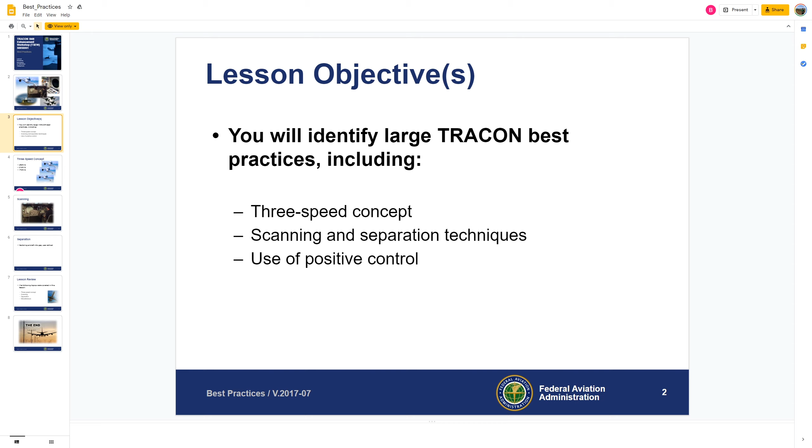So into the slides, if you want to hop down into the next one about the 3-speed concept. This one's when we're getting closer into the airport. There are more than just 3 speeds, but close into the airport, 3 is generally what we'll use. For scanning and separation techniques, generally we'll start from the closest to the airport and work our way out. And then we'll also talk about the use of positive control, how we will maintain altitude during turn-ons to the final. Close into the airport, basically 3 speeds are best: 250, 210, 170. And the reason why we'll shoot to use these 3 speeds is really for consistency's sake.

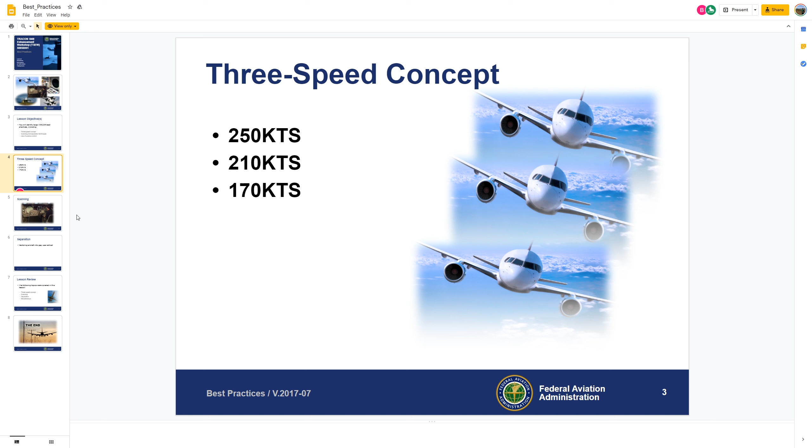250 slowing to 210, you're going to lose about 1.5 miles to 2 miles of separation before they hit the speed, and then slowing from 210 to 170, you'll lose about 1 mile to 1.5 miles roughly. For scanning, which is on the next slide, again, we're working from the inside of the airport out, primarily looking for overtakes, where aircraft are, trying to figure out lead-in times for turns from the downwind to final, etc.

Separation, that one also talks on the next slide there, just about using positive altitude for vectoring into the gap, use vertical. And this is more so when talking about putting a guy from downwind, base, final, in between 2 aircraft that are already established on the final. Although when vectoring 2 aircraft on opposing bases, you'll use vertical there as well.

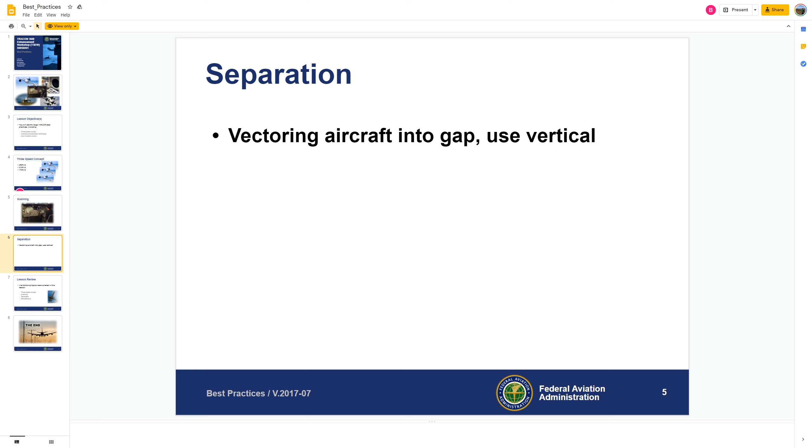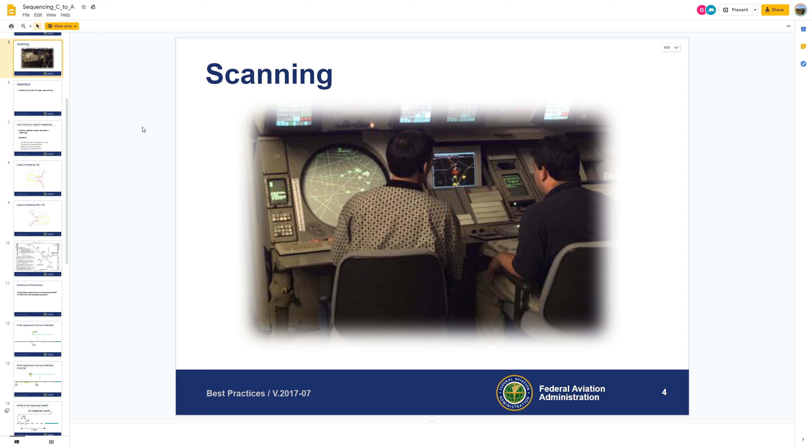What's the next slide there, Daniel? It is lesson review. Okay, yeah. So basically just kind of recapping what I talked about there, and that's the end. So moving on to C to A, if you have that one. Yes. Find the right one here.

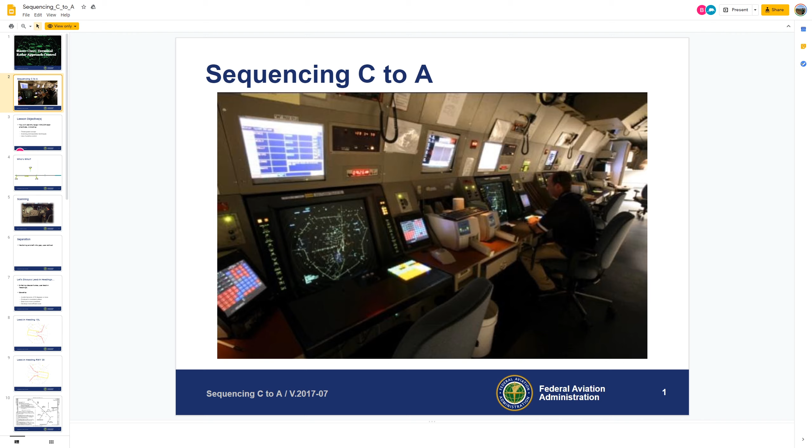That should be it. So this is really the meat and potatoes of what we're going to be talking about, of how to vector to final. Hop down to slide 4 for me, because that basically recovers what we did. So who's who in C to A? A is going to be the aircraft furthest down the final that is already established. The B aircraft is usually one that's already established further. So again, this goes back into what I was talking about earlier about moving a guy from the downwind, putting him onto the final between 2 aircraft.

As you can see, based on this concept here, both aircraft A and B are assigned 170, aircraft C is 210 knots. For general spacing on a final, aircraft nose to tail, you want roughly 4 miles when they're established outside of the final approach fix, assigned 170 knots. That'll compress down to roughly 3 to 2.5, depending on winds.

In this scenario, we have 10 in trail between aircraft C and aircraft A. Talking about what we were earlier, we're slowing from 210 to 170, you lose about 1.5 miles. If we want 4 miles nose to tail between aircraft C and aircraft B, how far do we let this compress before slowing aircraft C? Anyone can shout it out if they know it.

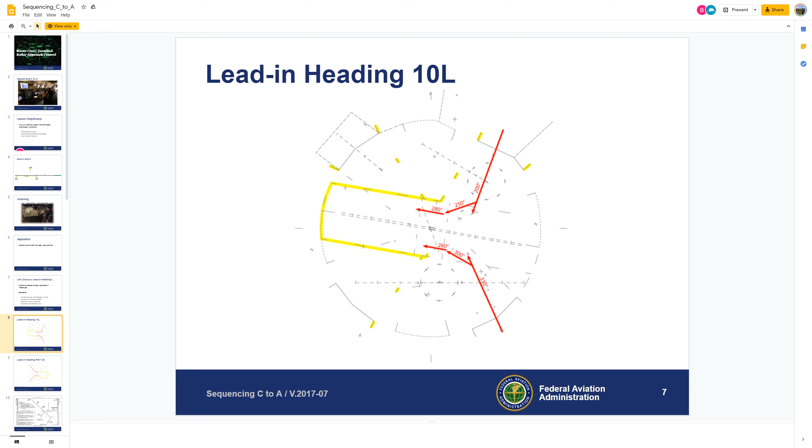The nice part is at most of your large airports, this is already going to be done by the arrival. It's going to be important when you start working at your major airport and start becoming familiar with finals. You're going to want to learn how far the downwind that the arrival has them on is from the final, because that's going to determine at what point you're going to turn your downwind to a base heading.

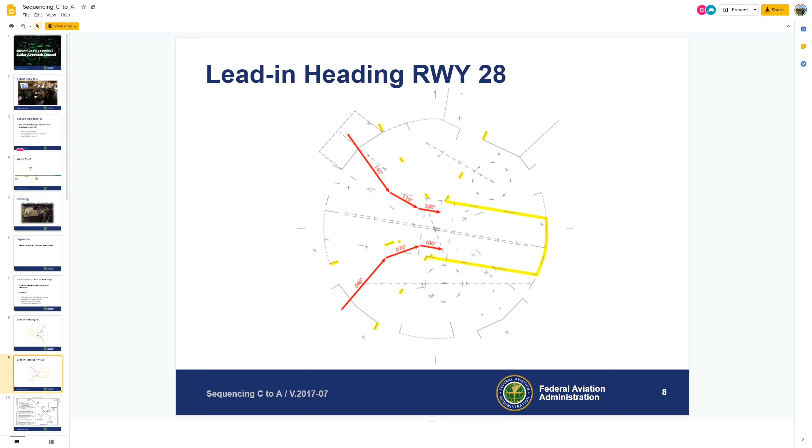The next slide basically just shows kind of what we were talking about here of the 3 different lead-in headings. This would be on runway 28 procedures, and then the next one basically just shows the STAR at Detroit, where the lead-in headings are basically already done for you. Sorry, Rona, I guess. Next one.

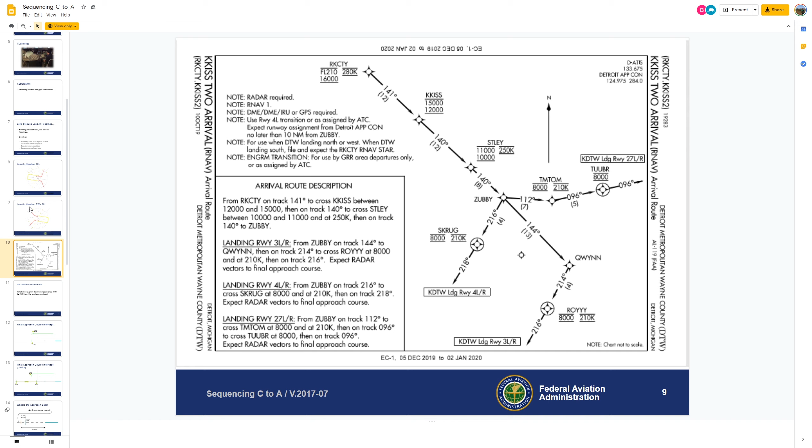Yeah, so I think that last slide basically talks about, all your RNAV arrivals are generally built to generate those tracks without you really having to vector to it, which is kind of one of the big advantages of all these Metroplex arrivals that we're getting now. Exactly, and just like this says, the downwind gets positioned between 4 to 5 miles from the localizer at most of the Core 30 airports around the U.S. There are some that are a little closer, a little farther.

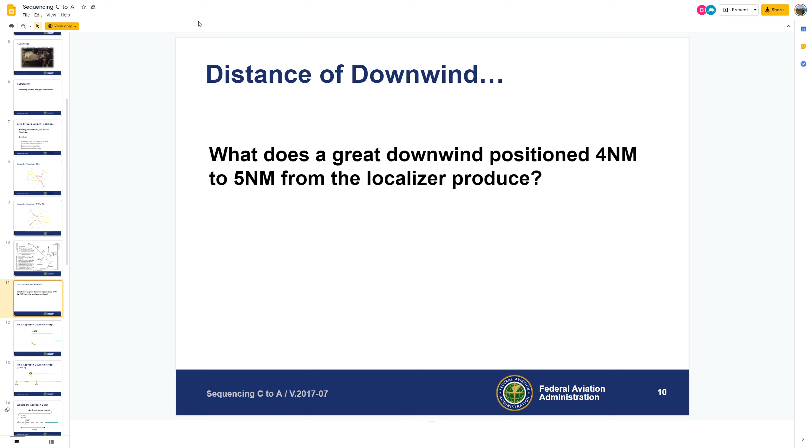And we'll talk about why that's so important here on the next slide. All right, so this particular aircraft, aircraft B, the downwind of this arrival establishes them on this... Say what? Anyway. This particular arrival establishes aircraft B on a downwind heading 5 miles from the final approach course.

If we're shooting for 4-mile gaps on the final outside of the final approach fix, we're going to turn aircraft B 1 mile prior to being abeam aircraft A, which is kind of what you see here, where it's showing the lead-in for the base turn. We want 4, we're off the final by 5, you turn a mile early. If your downwind establishes you 4 miles from the final, you'll turn abeam aircraft A, and so on and so forth. So if you're 6 miles off the final, you're going to turn 2 miles before aircraft A.

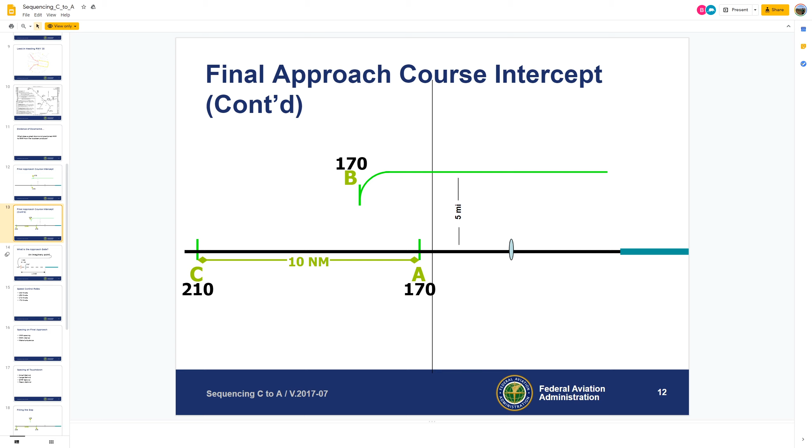Yeah, you can go to the next one. And then this goes back into the slide that we already saw previously. Go to the next one for me, Daniel. Sure. So this is talking about the approach gate. Hopefully all of you understand the approach gate. Do you think we need to go over this, Drew? I don't. It doesn't hurt. I think, okay.

Basically, by this point, one of the things that we teach as S3s is a mile outside the final approach fix is your approach gate. That's effectively the closest you're ever going to intercept, and there are very specific conditions when you can do that. If anybody wants to shout out the answer, what are we typically looking at to intercept final? And under normal circumstances, what's the minimum we can intercept final at outside the final approach fix?

Oh, that's right, everybody's muted. My bad. Brad. 3. Right. So 2 miles outside the approach gate. So 3 miles outside the final approach fix, which in a lot of cases at your big Core 30 airports, you're also generally using the fact that 3 miles steps you down 1,000 feet. So there's usually a step down fix about 3 miles outside the final approach fix that you can aim at as an intercept point. So it usually makes a good point of reference.

And to kind of parallel on this too, visuals versus instrument approaches, you want to control during busy traffic in visual conditions. You don't necessarily need to be running the ILS to make sure that everyone's doing what they need to do, but you want to control the situation similar to as if you were running an ILS. So you don't want to just turn them on base and then, yeah, we got the airport in sight, cleared visual approach. Give them a heading, fly heading, whatever, until established on the final, cleared visual approach. I'll just use mine, runway 22 right.

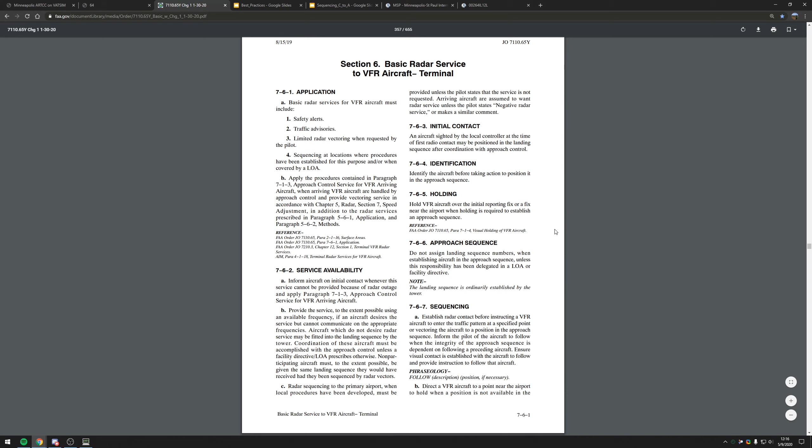Hey, Daniel, can you tab out to a 7110 and pull up chapter 7, section 4 real quick? Chapter 7, section 4. Yep. Because I think what Brad brings up is not just a good idea, it is actually technically in the book now, especially for all these big airports where we're running parallel runways. 7-4-4. 7-4-6. Here we are. So if you want to zoom in to, I think it's, yeah, when conducting visual approaches to multiple runways, there's that.

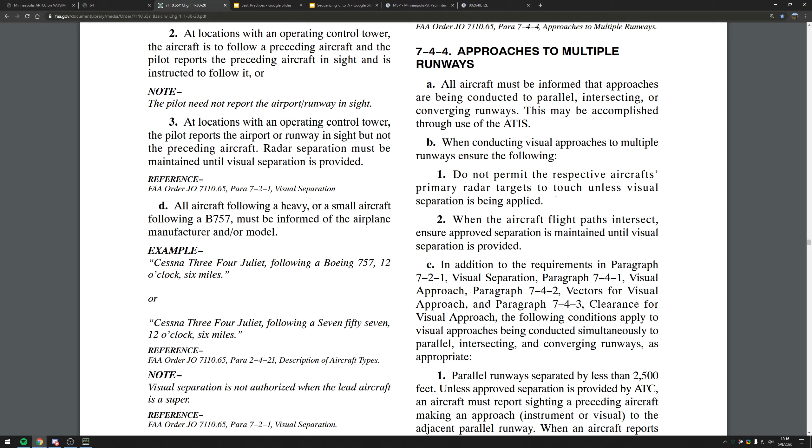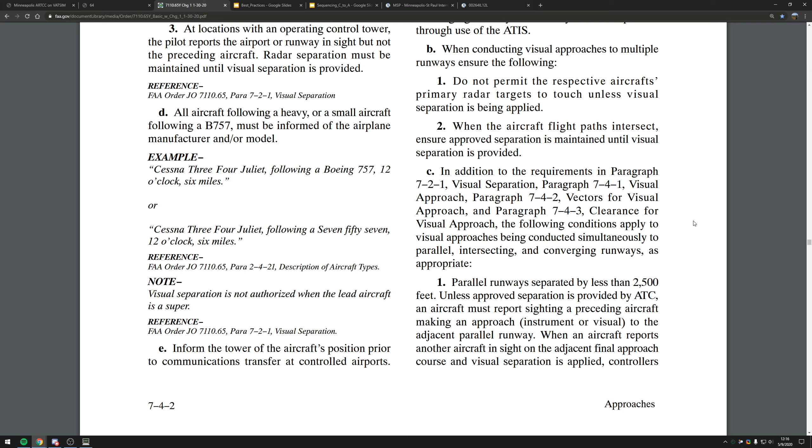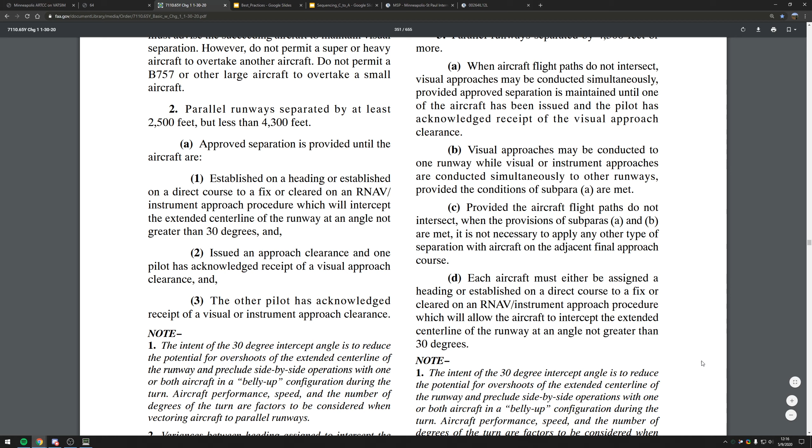So it kind of falls into a few different categories. So less than 2,500 feet, you're effectively treating him as one runway. He has to see the guy for the parallel in sight and be instructed to maintain visual separation prior to giving him approach clearance. Most of us fall into the greater than 2,500 feet category. And then it's either less than 4,300 feet. So for example, at Minneapolis, we fall into this where it says parallel runways separated by at least 2,500 but less than 4,300 feet.

Approved separation is provided until you're established on a heading or a direct course or cleared to an RNAV instrument procedure that will intercept the extended center line at an angle not greater than 30 degrees. So to Brad's point, you're still very much controlling their intercept prior to clearing them for the approach. So it's almost a hybrid of vectoring them to an instrument approach and then clearing them for a visual.

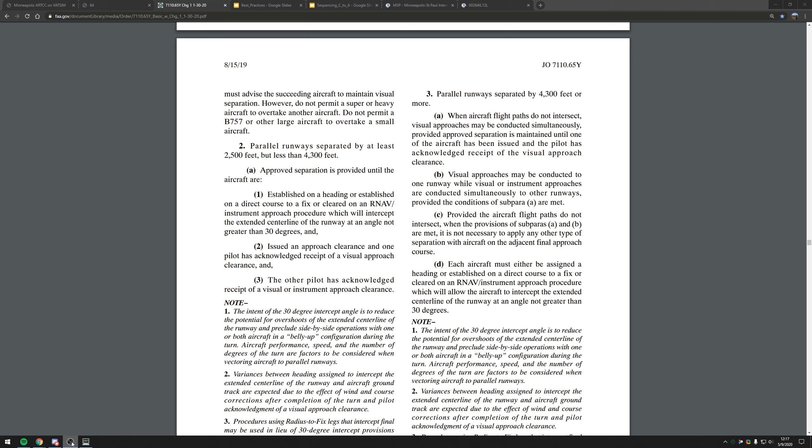And then if you look down in the note, it shows exactly why we're doing what we're doing, to prevent the intercept angle and to reduce the potential of overshoots. I can remember one a few months ago where I had cleared a guy for an approach, he blew through it, I had to issue traffic alerts, break guys off the runways, and came pretty close to having a deal because of it. Thankfully, the pilot turned in time and he didn't end up getting a pilot deviation because I didn't lose SEP. But yeah, definitely issue the headings.

Back to the slides. Affirmative. Here's another thing that I see a lot of people doing: they'll use 170 knots or 180 knots until whatever their final approach fix is. And the final approach fix, let's say, is maybe 7 miles or so from the runway. This is going to cause a lot of compression on your final. If you have 4, you're going to end up running to probably less than 2.5, just because of how far it is from the airport and different speeds on final. So I'm a huge proponent of maintain 170 knots until a 5-mile final. 170 till 5, and you'll keep your 2.5, no problem.

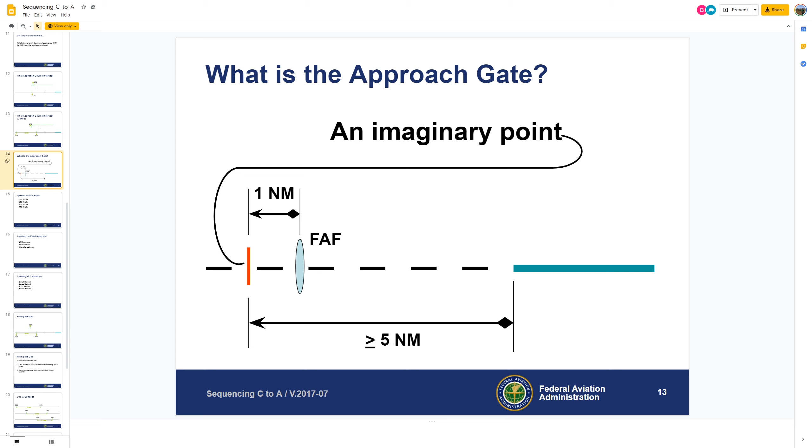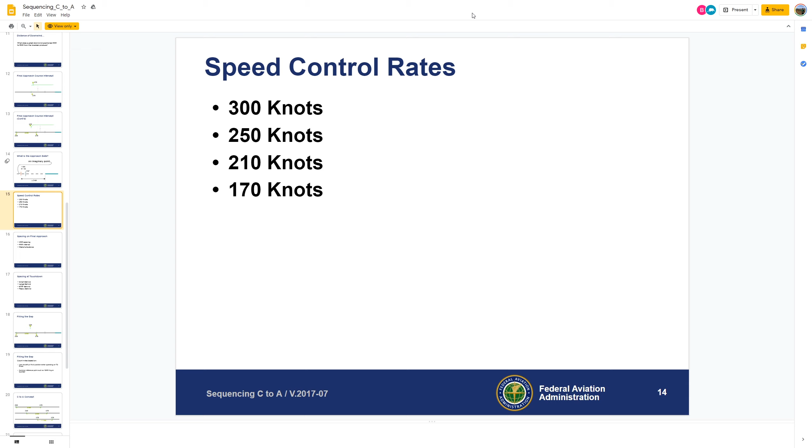Next. So the 250, 210, 300, those are going to be used when you're farther away from the airport and where you're essentially going to be speeding up. This is more from a feeder side, and we'll talk about that once we've hammered out some of the final stuff. Go to the next slide for me. So this goes back to what we were talking about earlier with 3 nautical mile spacing decreasing to 2.5. You do a 4 nautical mile interval on final prior to the final approach fix assigned to 170 knots.

Now, wake turbulence. Drew, what's the current stance of VATSIM or VATUSA on Wake Recat? I think there hasn't really been an official stance. I personally don't teach it to my guys because we don't have a convenient little data block field that shows a recat category. Sure. So I just tell my guys standard non-recat wake turbulence. So, shoot for 5 behind the heavy and you can't go wrong. Okay.

So essentially whatever your spacing is for wake turbulence, add 2 miles. So if you need 5 behind a heavy, you're shooting for 7 on the final. If you're behind a super and you need 8, you're shooting for 10 behind, which really is a large gap, and it feels wrong having that big of a gap, but it's what's got to happen. It sucks. Next one for me, please.

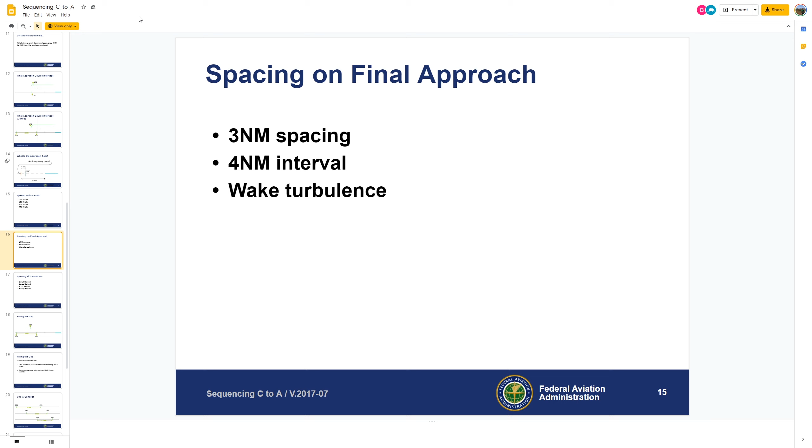Can I throw one more thing in there on that last concept? It's also important to note that the whole 3 miles at touchdown or 2.5 miles at touchdown, that's typically only going to be on runways that are exclusively being used for arrivals. Correct. So, for example, like the Minneapolis scenario you guys are going to see, we don't have the benefit of 2 sets of parallels, so our runways get used interchangeably, arrivals and departures. So at a place that's arrivals and departures, if you want to give your tower controller a chance to push out departures and you run a 3 mile in trail final, your tower controller is going to be ready to kill you by the end of the event. Yep. Probably will have killed you by the end of the event.

So what you'll see during the scenario that we run is more of a 6 compressing to 5 at touchdown, or a 7 compressing to 6 at touchdown, in order to gap for departures. And this comes back to knowing your own airspace and your own flow at the airport that you're working. Exactly. If your runway doesn't have high speeds, 2.5 isn't going to work. In fact, 2.5 is not legal if your runway doesn't have high speeds. You would have to go to 3. Yeah, and it's also important to note that 2.5 mile spacing is also only within 10 miles of the runway, correct? Correct. Yes.

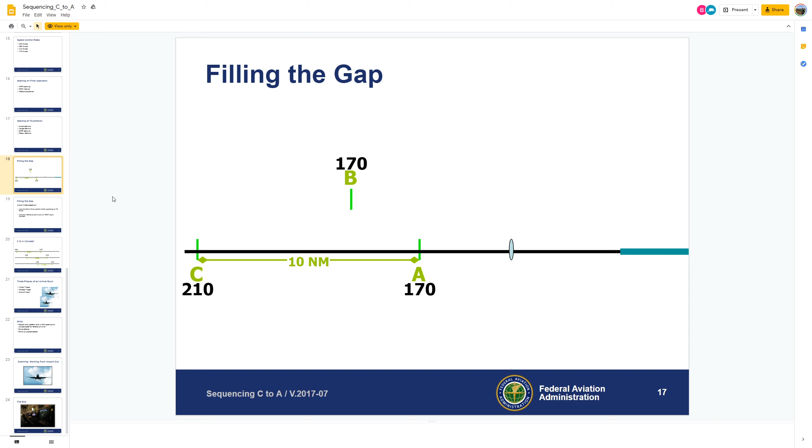Next slide for me. I think it's basically just a repeat of the previous slides. Hop down again. Do you guys want to add in there the utilization of same runway separation with the 2.5? Say that again, Austin. Do you want to talk about same runway separation as well with the 2.5 compressed final? Are you talking about from the tower side? Yeah. Do you think that would really be much to talk about here or no? I guess that is a fair point. Some local controllers can get a little squeamish with 2.5 in trail as far as issuing go arounds. The same runway separation states that you have to have with turbojets that we're going to be dealing with primarily at our airports.

The aircraft has to be clear of the runway prior to the aircraft crossing the landing threshold. The key word there being crossing the landing threshold, not on a mile and a half final, which I've seen happen. So don't be sending people around willy-nilly. It's quite ridiculous. Or you get pilots that hit minimums and go around because there's still a plane on the runway. That would have been clear if they were over the numbers.

Right. Well, the other thing also is that this is VATSIM. Guys don't always do an expeditious job of clearing the runway. So if I'm working local during an event and I know I've got a guy 2.5 miles in trail, I'm telling the front guy, hey, plan minimum time on the runway, traffic 2.5 miles in trail, or traffic 3 miles in trail. Part of it comes down to expectation management on the part of the pilots too. And then I'm probably telling the back guy, just to prevent it, hey, separation exists, still clear to land.

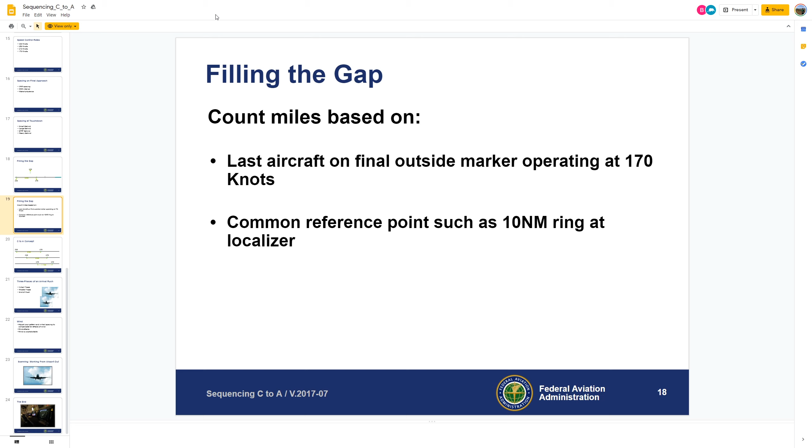So when vectoring aircraft onto a final, can you go to the next page for me? We're doing it based off of aircraft that are what we call fixed. So they are established on the final and on speed for what we're targeting. So if our target speed is 170 knots, I'm not going to use a guy that's established on the final doing 160. I'm going to go to the next guy that's established on the final doing 170. And for note, this is indicated. This isn't ground speed, the readout on radar. This is the airspeed that we have assigned.

Excuse me. Next. Yes, please.

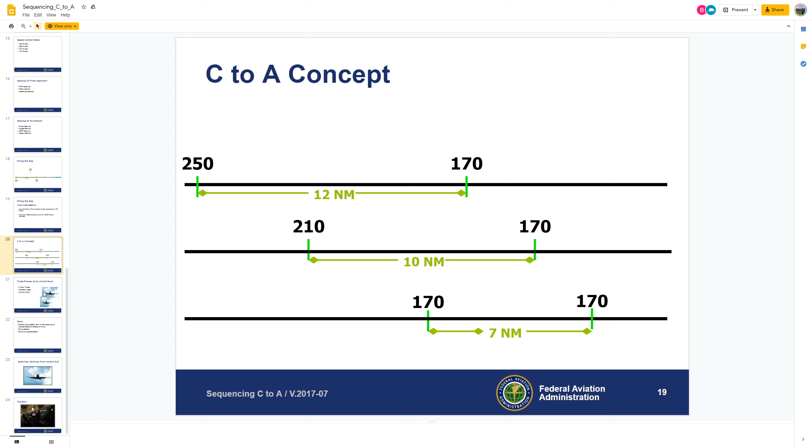This isn't so much important to VATSIM per se. Well, yeah, I guess it kind of is. I think it comes down to don't waste mileage early on when you don't have to. Exactly, yes. That is the complete concept of this, and the thought process behind the initial, middle, and end is in the initial part of the rush, we're keeping aircraft fast. We're not slowing back down to the 210, whatever, way away from the airport. Maybe we're deleting speeds on the arrival, telling them, hey, maintain 250 knots. We're trying to get them to the airport and on the ground as fast as we possibly can.

So we're not doing all of these set 210 on the downwind, 170 on the final. You can kind of get away from some of that and get the airplanes there as fast as possible. The middle phase is when you're going to start pulling things back. The traffic's increased. Now we're going to start going back to basically the set procedures that we have for that airport of doing the 210 on the downwind, slowing to 170, turning final. And then the end of the rush is like the initial, you're coming out of that and you can start speeding things back up. Next slide for me.

And it's important to note there that you might not be assigning speeds. If you don't want him necessarily slowing down as you're starting to build up, the number one or number two airplane, the first couple in the lead of the pack, instead of 210, you might say 210 or greater, and then you give them the approach clearance, and instead of 170 to 5 miles or the final approach fix, it might be maintain 170 or greater, just so that you're putting a floor on it, but you're also giving the pilot the opportunity to slow.

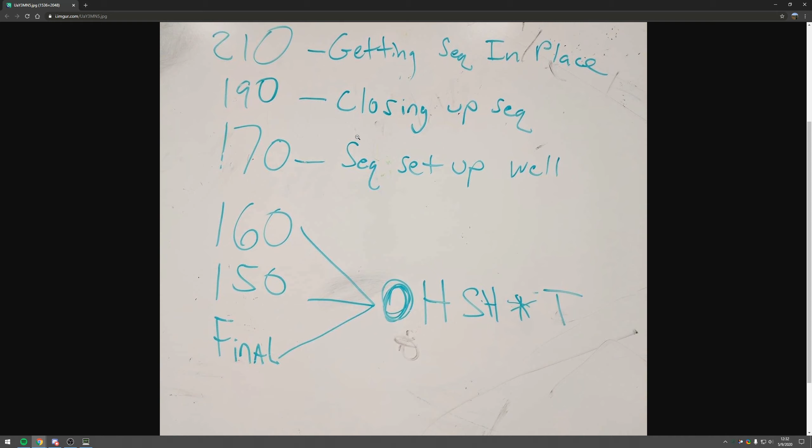Just know that the faster you are on final, to either 5 miles or to the final approach fix depending on what's out there. Yeah, no kidding. That's from an actual debrief at Minneapolis Tracon.

Where'd you put it? It's up on the stream at the moment. Oh, so there we go. That literally goes back to everything Brad's been talking about. At 210, you're still getting the sequence in place, it's starting to come together. At 190, you need to start slowing down, you're closing it up. At 170, we're locked in, like you said.

And then if you need slower than that because you turned a guy a little early or a little late, things like that, it is doable. The section in the 7110 and 5-7 does say lower may be assigned if operationally advantageous. If I'm going to have a deal because I didn't slow him down to 160, you're damn right it's operationally advantageous for me to slow him to 160.

I'll throw something out here too. I'm kind of more of the opinion that 160 is similar to a 170, but below 160 is definitely the oh crap moment. Right.

If you're having to slow somebody to their final approach speed or reduce to your slowest practical speed, and you're 5 miles or more from the final approach fix, you should basically just go, I've screwed this. That aircraft is coming off the final, and you're going to assign 190 to the guy behind him and try to close up your spacing with the guy behind him. There's a certain point where you need to cut your losses, because when you start slowing that final to less than 160, the entire final will go to hell in a handbasket.

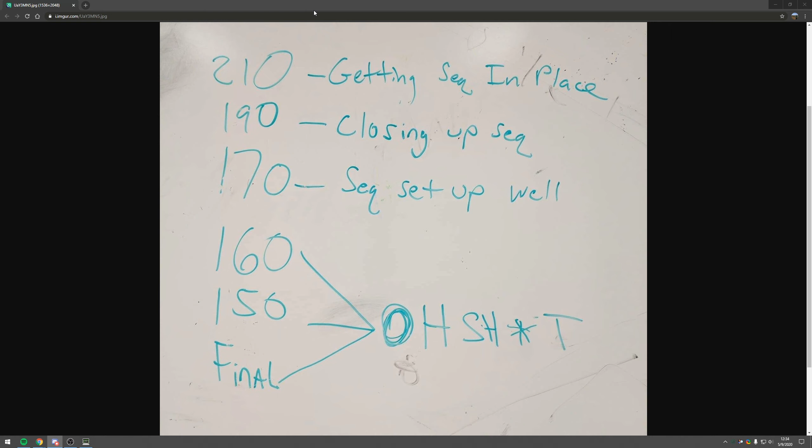That really, I think, wraps up as far as the PowerPoint stuff. I think once you see them actually working and we can explain the C to A with actual traffic of where you base to final and stuff, that'll make more sense for you guys.

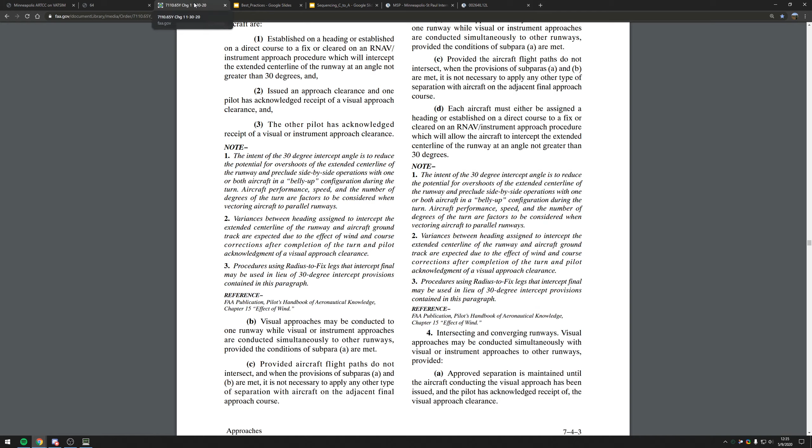We will pause at certain spots to highlight key things, because there are a few gotchas in the scenario. There's a couple cases where feeder screws up and gives you a stack, a couple tie cases or things like that, and then the dreaded turboprop shows up at some point.

Should we talk about feeder sequencing now or give that a little bit of time? We can talk about it kind of as it plays out, if you're good with that. The problem with this particular scenario is they don't spawn at the Tracon boundary, they spawn about the point where Final's taking track control. That's all right, but we can kind of talk about this is what a feed looks like.

For instrument approaches, the general thing is you want to, as a feeder controller, you have all the space, you have all the tools. You want to generally set up guys to a point where you're feeding your final controller 7 to 9 miles in trail, depending on what your constraints are on the instrument approach. So if you're feeding the final guy 2 streams at 5 miles in trail, you're really not giving him anything to work with. You're literally sending them down the crapper.

This kind of goes back to the whole 4 miles on the final, if that's what they're running, 4 to 5. If you're giving them 2 streams of airplanes, aka bases and downwinds, which is usually what most airports are set up for, you can't be giving 4 on each feed.

You have to be giving at least 8 per feed. So downwinds are spaced 8 miles in trail, and bases are spaced 8 miles in trail, because he's got to take that 8 and turn it to 4 in trail on the final.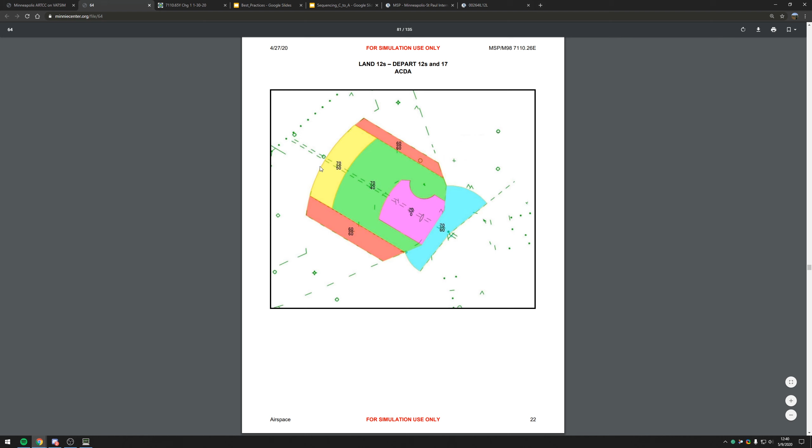As far as the approach chart goes, here's what we have to work with. So there's the 3,000 foot fix Weza, Hamel is 4,000, Allergen 5,000, then You Betcha and CJ for the 6 and 7,000 foot fixes. I'll show you those on the video maps too. So we got Weza, Hamel, Allergen, and then 6, 7 here at the 20-mile ring, I think. Yeah, so the outer marker symbols are 3, and then every tick outside of those goes up 1,000 feet.

It's also important to note that you see that outside that area where final owns down to the ground, they only own down to 4,000. That conveniently fits with the fact that the Bravo only goes down to 4,000 in the final box. Right, yeah, just need to play with the brightness a little bit here. Second.

Okay, I'm gonna go John Madden here for a second and draw this out. So you've got your 1,000 foot, 4, 5, 6, 7.

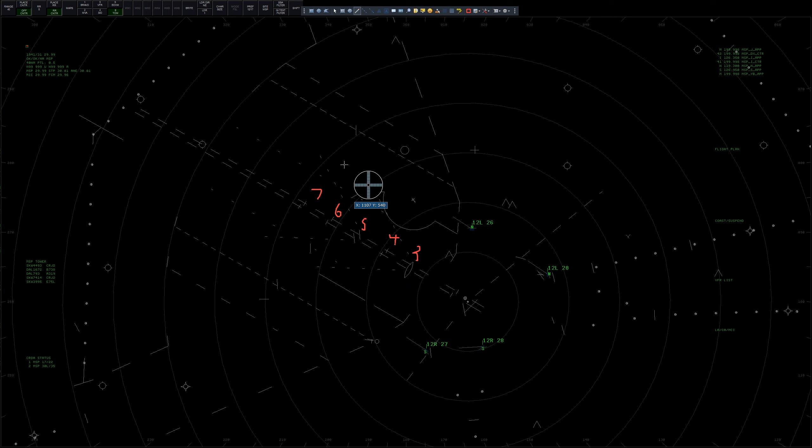And then these two ticked lines here are 30-degree intercept lines. I'll draw it out here. These dashed lines here and here are your intercept lines. So this one here you can see is at the 5,000 foot fix. Like I was saying earlier, that's where we typically are joining the final, because the high side has to join at 5,000. If you're running simultaneous approaches at Mini, you usually have to join around this fix. So there's a 30-degree intercept line there, and then there's a 30-degree line at the final approach fix itself, the 3,000 foot fix. And then these long dashed lines here are your 3-mile fixes from the adjacent final approach course. So this is 3 miles.

Very good art there, that's something to key on. So then you can look at that. That's per SOP: the low altitude runway has to be level at their turn-in altitude prior to crossing that line on base, and that's so you've ensured vertical separation from the high altitude guys' airplanes before you cross that line.

Well, that's a special addition to the SOP, ain't it? Yeah, separation is in the SOP. Glad we don't have that in ours.

Yeah, and that's the case, and you'll see it at Atlanta, you'll see it at O'Hare, you'll see it at all these places with multiple parallel runways. Your low altitude runway will turn a 20-mile final down super low. By design, you'll be level at 4,000 for 8 to 10 miles on final, or whatever your low altitude is.

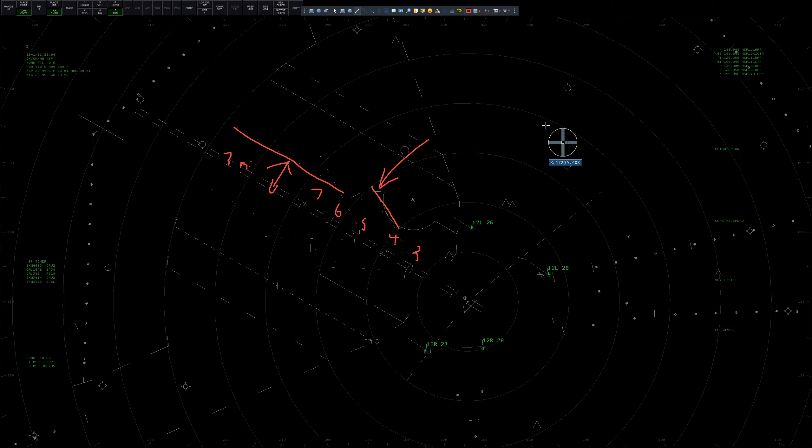Yeah, like O'Hare joins the low side at like the 5,000 or 6,000 foot fix at 4,000 or something like that. They join the low side at 4, they join the middle at 7, and they join the high side at 5. Sorry, the middle runway at 5, and the center runway is the high runway, and that'll join at 7 typically. There you go. That makes more sense. Words are hard.

Yeah, it's okay. All right, so out of curiosity, are those adjacent lines your 30-degree intercepts there? Is that for the visual approach? Yeah, that's visual approaches. Basically, the way they typically use them is if they're inside of that 30-degree line, they can clear direct the FAF and clear for the visual, or clear direct the IF and clear for the visual if they're inside. That's just ensuring that if I clear the guy direct the FAF or turn him in from there, it's less than a 30-degree intercept to final.

All right, if that makes sense. So anyway, moving into the scenario, it's the 12-1-7 configuration, arriving 1-2 left, 1-2 right, departing 1-2 left, 1-2 right, and 1-7. It's IMC, so basically you're stuck to using ILS approaches.

So things to take away from this: the descend-vias spit the downwind guys out at 8,000 and 230 knots. I'll pull it up here as well. You can see there, that's the arrival, that's what the arrivals do. So getting back to what Brad was saying about lead-in headings, you can kind of see the arrivals are built to generate those.

Yep, so the bases shoot them out at 7,000 and 210 knots. The downwinds shoot them out at 8,000 and 230 knots.

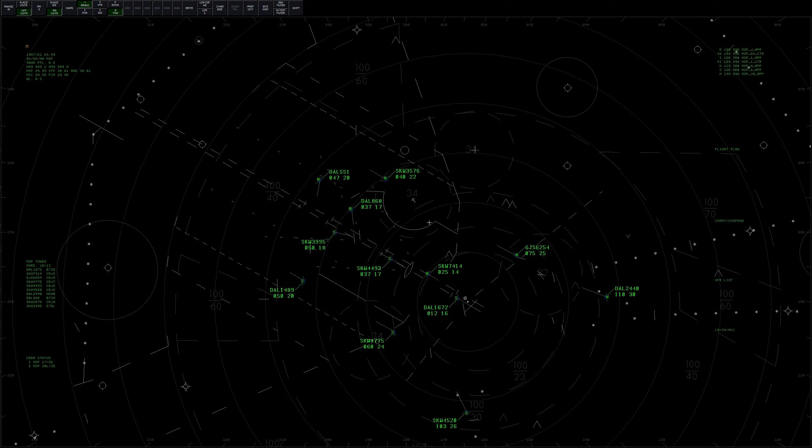Where's the 3,000 foot shelf for the Bravo? Because ideally, I think Delta 060 would have been stepped down to 3 and turned sooner, because SkyWest was already getting pushed out, and you could go 3 behind SkyWest 4493. Right. Yeah. It's at about the 10 mile. It's just outside the 10-mile ring. Yeah. So, anyway, good. Get it going.

And again, the other thing he pointed out is that he was going to break the 3-mile buffer with Delta 551. So whether or not it's the explicit definition of a point out there, he's just telling me, hey, watch this guy, I'm not going to be below your traffic. Right, which is the key thing. So again, talk to your other final controller if there's 2 of you. Don't be muted and unreachable. That's the worst thing you can do. Yeah, mute. That drives me nuts.

Also, keep in mind that you might not be all that busy working an event, but another guy in your channel is. So keep chit chat to a minimum. If you want to chit chat with somebody, go to a different channel. That irks me to no end during an event. Or if people aren't respecting that, then you, as the busy controller, go to a different channel where you're reachable and unmuted, if somebody needs to find you. That's something I would encourage management at facilities to do: if someone's busy and people are in that room just chatting it up, move them out.

So Chris, looking at where we've got Delta 060, if you need to cut your losses right now, what's our plan? If I need to cut my losses, Delta 060 is going to left turn to 360, and he's going to stay at 3,000. I'm going to keep Delta 551 moving in, put Delta 060 behind my SkyWest 3576, and then Lindbergh will follow Delta 060.

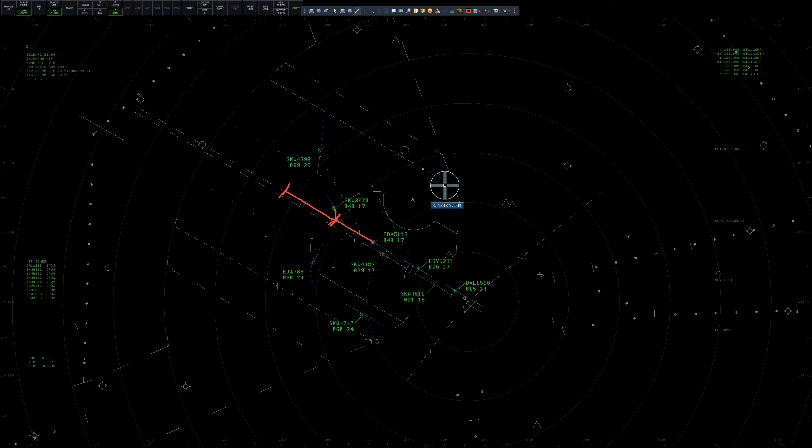I don't know. Maybe that kind of illustrates it. Maybe not. That is kind of eyeballing it. Yeah, so ideally your 12 is Endeavor to that last red hash mark, right? Skywest is falling in 6 miles behind Endeavor. You need your downwind to fall in 6 behind Skywest. I'm not using Skywest as my reference because he's what we would call a broke aircraft, because he's not established on the final.

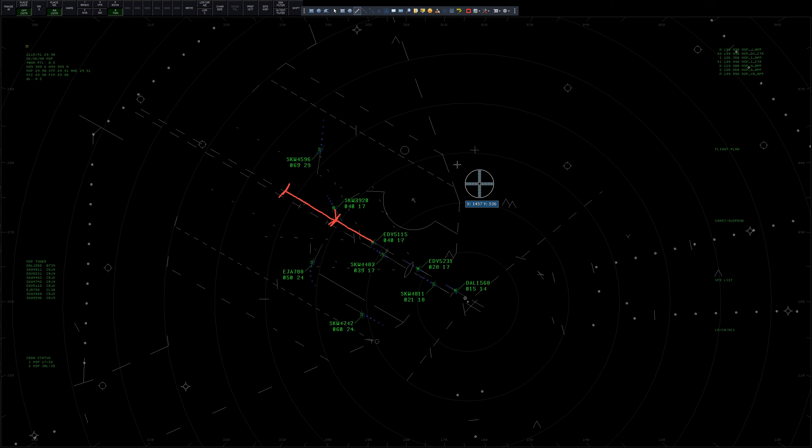What's going on with 4596? What's it look like? Oh, never mind. I see. Oh, that's nice. Coordination was effected. That speed overtake, though. Yeah, he's following. He was told to follow. He's following. It's legal.

Maintain visual separation with the Challenger for the parallel. Follow company. Cleared visual approach. 1-2 left. A small CRJ.

So to answer your question, Clay, you don't have to worry about the whole established on before losing vertical and all of that. But if you're opposing bases, you're still going to want to keep separated by altitude. Because the ultimate question is, what happens if you lose your frequencies? Exactly. Which is why positive separation is such a big thing.

You just start working the final on guard. I've seen that. What if guard goes out? Actually, I haven't seen that. I know that happens. If you can get a word in edgewise between all the meowing. Right. Tell us about the 290 heading to St. Paul on 3-2.

Well, to answer that question, Jared, visual separation does work, and it should not be a bailout, because a bailout means you did something wrong. Visual separation is used to increase efficiency after they're already separated. That's the key. That's to ensure that separation exists before and after the application of visual. So if it's a bailout, separation hasn't been ensured before the application of visual.

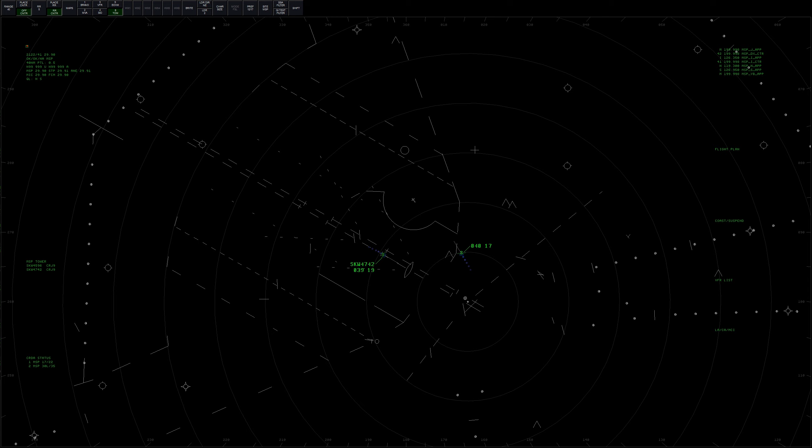Yeah. Or, if your training staff for whatever reason doesn't necessarily have it, try to create the files yourself. It's not terribly unintuitive software. It's not perfect. You know, even building a basic sweatbox to some Charlie or Delta in your airspace, some TRACON like that with a single radar position.

Like say at ZMP, we could do Sioux Falls, where you just have 5 or 6 planes, 4 on the downwind, 2 on the base, or something like that, and just practice that concept. And it doesn't have to be overly complicated either. Yeah. All you need is 2 aircraft and just managing. You just need to manage the speeds and vector in a box, like Drew said. You only need 2 aircraft to do that. Yeah.

If you're looking for Aircraft Situation Editor, which is what you can use, the original author has taken it down, but it is still available on Softpedia or Software Informer. Yeah, so make sure you're running EuroScope for the files, because if you have it set up right, you can also run them profile too, which is a lot better than doing everything manually.

And doing what Drew and Chris just did, that won't happen overnight. Like they said, that's going to take practice, and you will screw up. That's just the reality of it. Yeah, we screwed up 5 or 6 times just running it. Exactly. I think the first time me and Shane took a crack at this scenario was messy. I think the final was out to the 25-mile ring or something. Yeah. The big thing is you get better by picking up as far as...

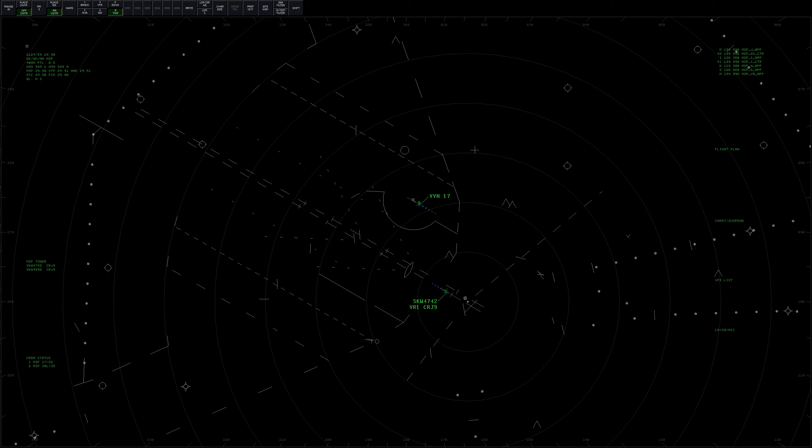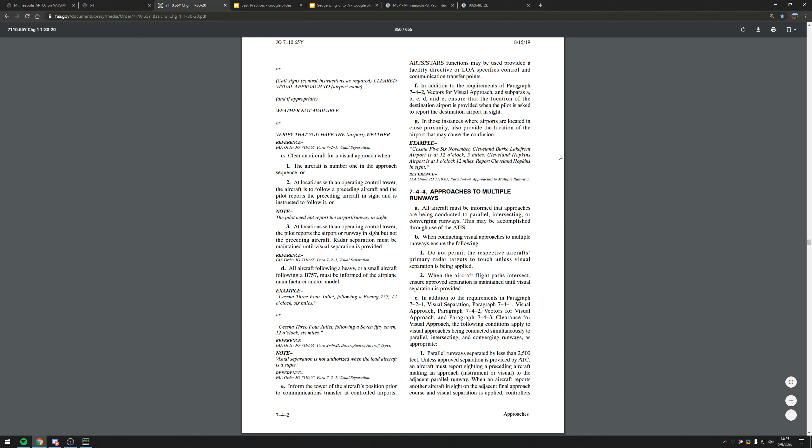Hey, Drew or Everman, do one of you guys want to cover the visual approach rules really quick? Yeah, I can pull the points back up. 7-4-4. Yeah, so approaches to multiple runways. Minneapolis, it's separated by 2,500 to 4,300 feet. Yeah.

So established on a heading, or established on a direct course to a fix, or cleared on an RNAV instrument approach procedure, which will intercept the extended centerline at an angle not greater than 30 degrees. And then one pilot has to have acknowledged receipt of a visual approach clearance, and the other pilot has to acknowledge receipt of an approach clearance.

I have a quick question regarding the whole EuroScope situation. Am I understanding it correctly that you guys had 2 pseudopilots working at the same time? Yeah, one pseudopilot working each final. This is split. This is 2 EuroScope scenarios, a north one and a south one split up.

Okay. If I was missing a part where I could do 2 pseudos to one problem, that would really open some doors. I guess you could. The 3.2 simulator has ways of passing airplanes between pseudopilots, but you lose the ability to type, because I don't think ES key works with it. No, it doesn't. Yeah, that's a problem.

I see. This is kind of off topic, but have there been any updates to ES key in the last while? The one I have is old. No. I don't know.

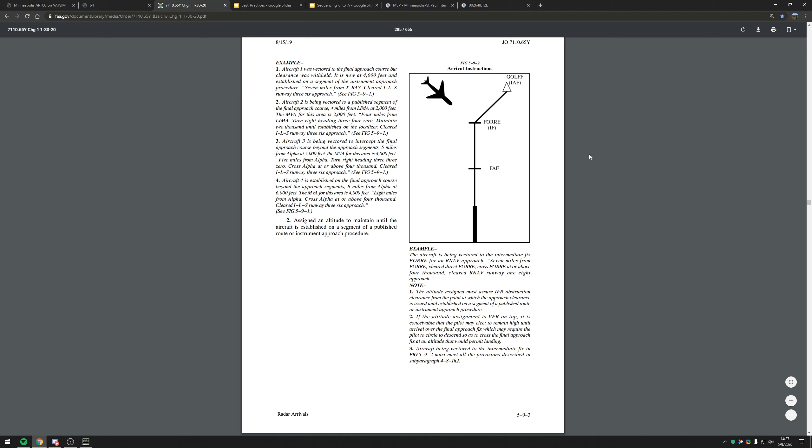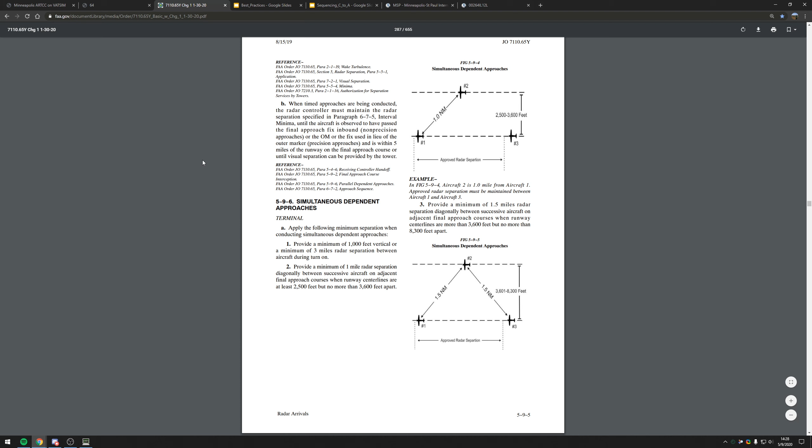And then for those of you wondering about dependent and independent approaches, it should be 5-9. 5-9. And then 3, no 4, wait no 5, 6. It's 6 and 7. Yeah, it's 6 and 7. I got there, okay? Yep. 596, yep, for simultaneous dependent, and then 597 for independent.

Any other questions? I'll throw one thing out there. You guys can basically throw the whole use or requirement of PRMs or monitors for independent approaches out the window. Right, yeah, we just assume that those exist on VATSIM. Exactly. Because otherwise you go down to requiring them to be staggered, basically. Yes. The days when Minneapolis had a PRM. Yeah, Atlanta, you're welcome. That equipment came from Minneapolis. Yep. Stole it. Well, so did we. Although we can do ILSs to the outboard at Detroit without monitors now. Right. For widely spaced parallels.

I think, Nolan, I don't think you ever need to really staff a final monitor. Somebody's gonna break them off if it doesn't work. Yep. The key is somebody has to make the decision to break them off. Has to do air traffic stuff, can't just hope.

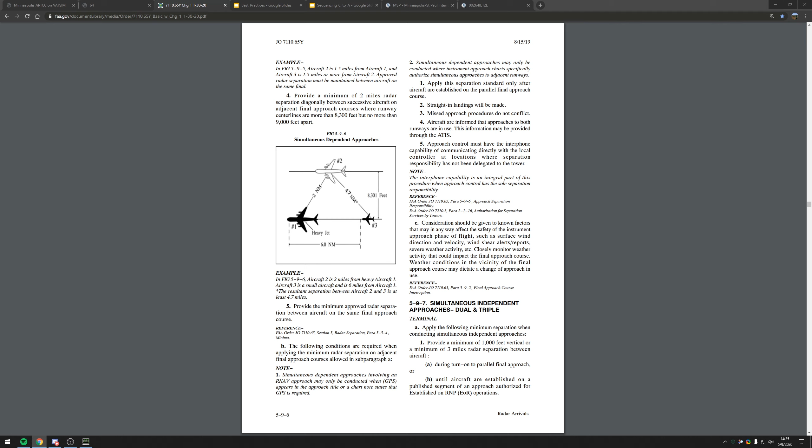And I would tend to disagree with that. It depends on the facility - I'm just talking Minneapolis. The big issue you get, and this happened a couple times in that scenario which I didn't touch on, is you're turning the downwind in so close to the final because you're trying to catch up - you turned your downwind to base too late. So now you're trying to catch up and get behind your guy on final, you end up turning too soon and lose 3 miles laterally with the aircraft on the downwind. I think Chris kept the guys on the downwind at 5,000, and once they had diverging, he put them down to 4. I'm just talking Minneapolis, I can't speak for any other facility because I don't know the airspace or how it's run.

That was just my 2 cents. I think Jordan's actually got some pretty cool videos where he matched that MACNOMS flight tracker up with live ATC, and it's actually pretty sweet to see what they do. The only bad side is you don't see the video maps - that is the only bad side. But you can still see their flight path and kind of get an idea about what's going on, and it's pretty sweet. I guess I'll post it.

Yeah, if you want to post one of those, that'd be cool. But I don't know if it'd benefit anyone else - this is just an M98 thing, and this class is about final for any facility, our example is just M98. One of the things you've stated to me that helped a lot during training was go listen to the live ATC of your facility in the real world, if you can at least. Yep, that right there.